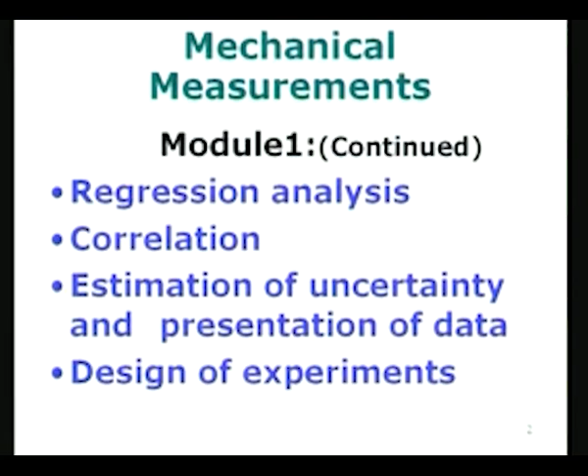And the last topic in module number 1 would be the design of experiments. We will talk about how to conduct the experiments, whatever may be the type of experiment we are going to do, how to organize the different instruments, how to look for the proper instruments to be used for the measurement in the particular experiment we may have in mind, then how many data to collect, what kind of variations or ranges of data we should have, and so on and so forth. This will be the final part of module 1, which will be on the design of experiments.

With this overview, I am going to the first lecture in this series, which is just an introduction to the study of mechanical measurements.

Measurements can be classified according to the field in which we are going to be working. Electrical measurements, of course, describe measurements in electrical engineering or electrical sciences. Measurements in physics or physical sciences have their own flavor. Measurements in biological sciences, they have their own flavor, and so on.

Mechanical measurements pertain to measurements which we undertake in mechanical engineering to describe various systems which we meet with in practice. There may be a thermal system, there may be a mechanical system involving measurement of length, velocity, acceleration, and so on. It could be thermal, for example, temperature measurement, pressure measurement, anything which has to do with the thermodynamic or thermal characterization of systems, which will come under that category. And then, of course, there are various other ways of classifying measurement, which will come to as we go along.

So the three important reasons for making measurements are: one, generate data for design; two, generate data to validate or propose a theory; and three, for commerce. In this set of lectures, we will be interested only in the first two, that is, generating data for design and generating data to validate or propose a theory.

With that brief idea about why we carry out measurements, let us look at the categories of measurements. Different people might categorize it in different ways, but I am going to give a possible way of categorizing measurements. There are, in fact, only two major categories: one we call the primary quantity, shown in the slide, and the second one I call the derived quantity. I will describe this more fully in a moment—this is regarding the quantity we are going to measure in our experimental or measurement process.

For the primary quantity, for example, I can think in terms of the temperature of a system or the length of an object. This is the primary measurement, which can possibly be done using a single instrument.

For example, time - I am going to use a clock and make the measurement. There is nothing more to it, there is no division possible. Time is the measured quantity, and there is only one quantity I am going to talk about when making the measurement of time or time duration of a process.

However, when we talk about the derived quantity, it will assimilate into itself several different measurements. As an example, I can give velocity. Velocity is the distance travelled by a certain moving object divided by the time it has taken to cover that particular length of travel. So the derived quantity requires at least two measurements: one, the measurement of the distance between the two points which has been covered by the moving object, and then the time it has taken for this particular action or activity.

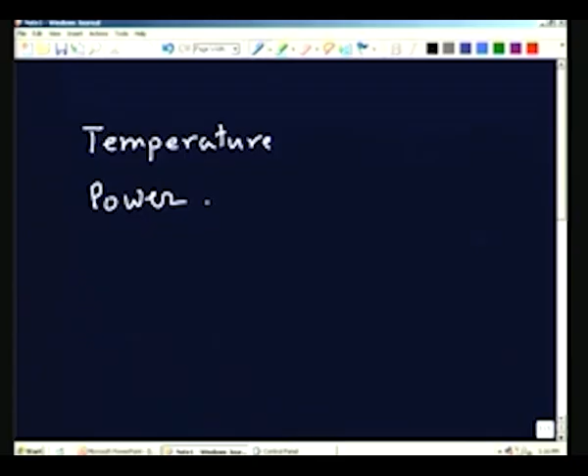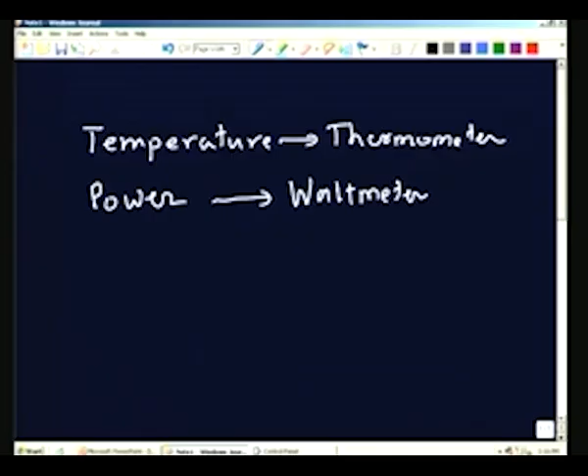Another example would be the measurement of power. Let us take the example of an object which is heated, and the power can be measured using a wattmeter, temperature could be measured using a thermometer, and suppose we want to look at the process of heat transfer.

We measure the temperature of the object, we measure the power which is given to the system, then the heat exchange is measured in terms of a flux, which is nothing but power divided by unit area. Power itself is a quantity which is per unit time. So when I say heat exchange process, I am talking about a flux which is the ratio of power per unit area. The power is measured using the wattmeter, and the area has to be measured using subsidiary measurement.

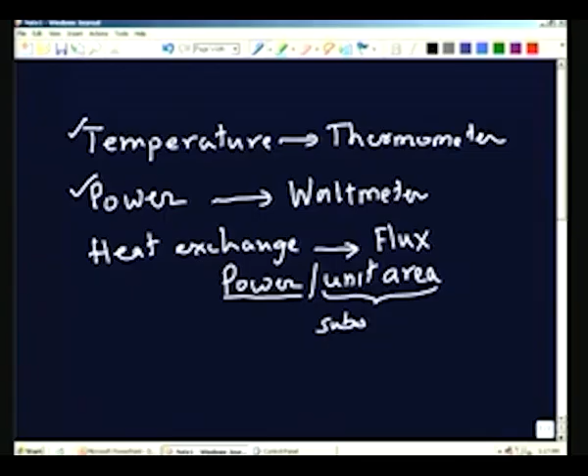For example, if it is a cylindrical object, I will measure the height of the cylinder and the diameter of the cylinder.

So if I am interested in finding out the effectiveness of the heat exchange process, I would be introducing a quantity like the heat transfer coefficient. This example will show exactly how many different things we have to measure for obtaining this quantity called the heat transfer coefficient.

We can define this as power dissipated per unit area, that is the flux, divided by the temperature difference between the system and the surroundings to which the heat is being transferred.

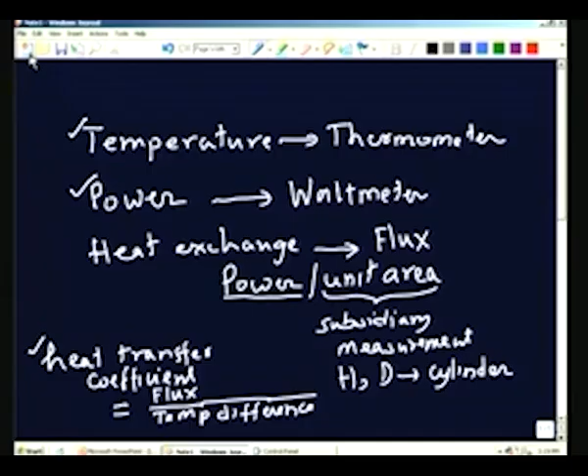So let us use some symbols, and then in the next page I am going to show what is happening. If I use the heat transfer coefficient as H, this is nothing but the power dissipated per unit area, P divided by A, divided by delta T, the temperature difference.

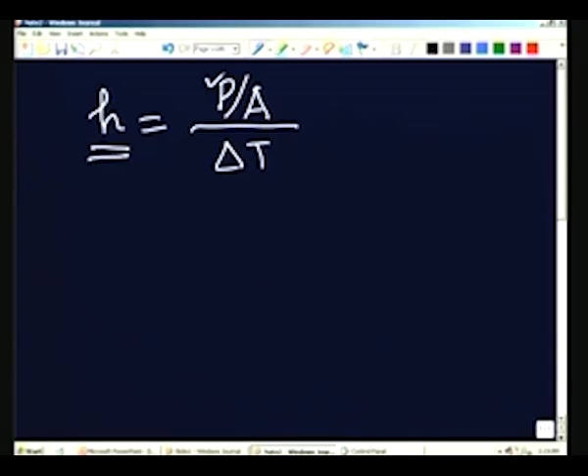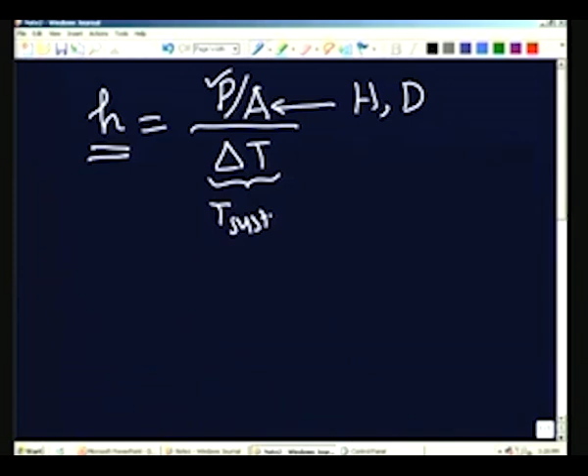So the quantity which I am interested in finding out, the heat transfer coefficient, requires measurement of power, one primary quantity which is being measured. Area itself may involve measurement of the height of the cylinder and the diameter as I indicated. Therefore, two measurements are going into this, and of course here I have the temperature of the system and the temperature of the coolant or what is taking away the heat.

So essentially, if you look at this particular simple experiment of determining the heat transfer coefficient from a cylindrical object to a coolant flowing around it, I require 1 power measurement, 2 length measurements, and 2 temperature measurements. So the total number of measurements is just the sum of all the 1, 2, 3, 4 and 5. 5 measurements are at least required, and all these 5 different measurements are of different quantities.

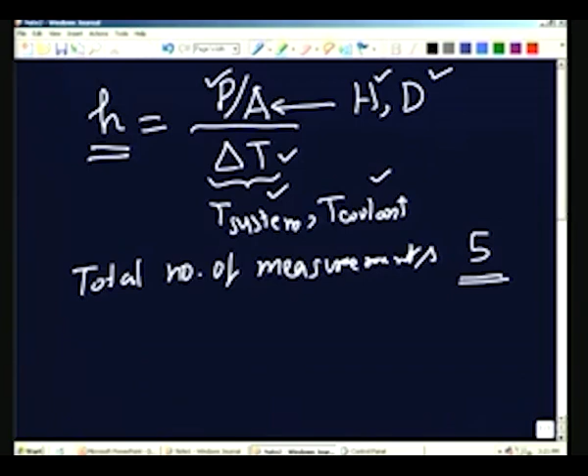Power is the amount of heat which is being dissipated, which may be measured in terms of the amount of heat input to the heater if it is an electrically heated object. Then the area involves the height and the diameter measurement, these are length measurements, both are lengths. They may require different instruments. The height may be measured by one instrument and the diameter may require the measurement using, for example, a vernier caliper or something like that. And the temperature, of course, we may require different thermometers as required.

So the total number of measurements is 5, and what we are going to get is one derived quantity. So to get one simple derived quantity, the heat transfer coefficient, which is normally used in heat transfer applications, I require to make at least 5 measurements to get an idea about this derived quantity. Therefore, 5 primary measurements or 5 primary quantities are measured, maybe using 5 different instruments, different types of instruments, and then they are combined together using a simple formula like this, P by A divided by delta T. Of course this formula seems very simple in this case, but there may be cases where the formula may be more complicated.

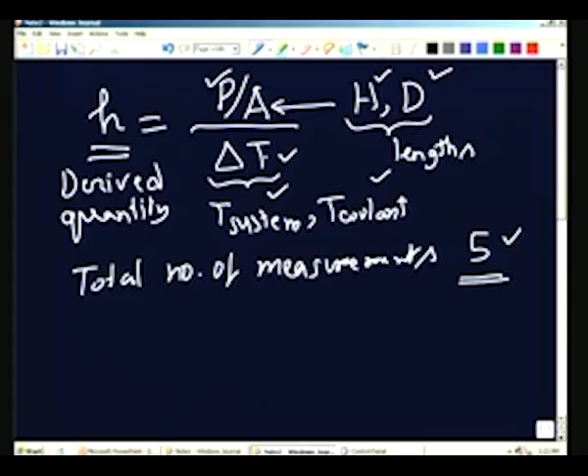Let me take one more example. Suppose I want to measure the volume of a vessel. This is also an important measurement which is required in many applications. There are several different methods. Let us just look at 1 or 2 ways of doing it.

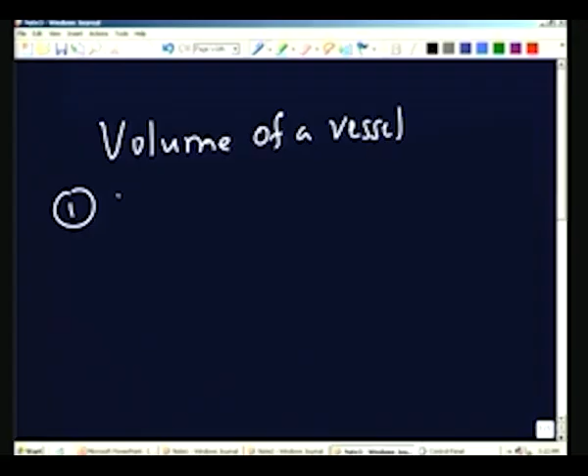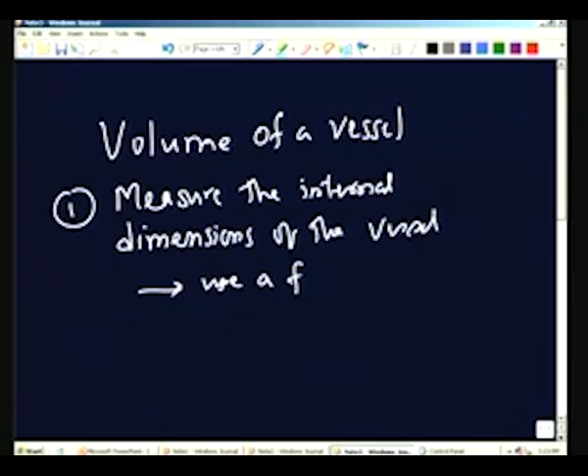One is, of course, to measure the dimensions, measure the internal dimensions of the vessel, and using a formula to calculate the volume. A second method, of course here we are measuring, but we are measuring the internal dimensions and then combining them using a formula.

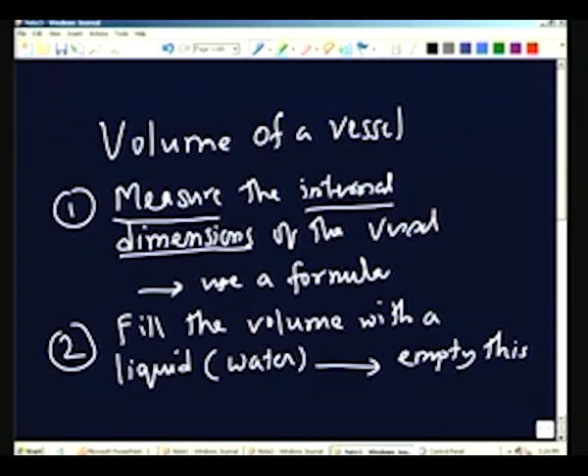Or we can fill the volume with a liquid, so fill the vessel with a liquid like water, for example, which is easily available. Then empty this into a measuring jar.

So let us look at the difference between these two methods of measurement. In the first case, I am measuring the internal dimensions. If it is a spherical vessel, for example, if it is known that it is a spherical vessel, I need only one measurement, the diameter of the sphere, the inner diameter of the vessel.

If it is a complicated shaped object, it becomes more and more difficult to make this measurement. This is difficult to perform if the shape of the vessel is not very simple. So the method number 1 is not necessarily the one which we are going to adopt.

The method number 2 has some great advantages, because the shape of the vessel is not a very problematic thing in this case. You just fill it with water and then transfer this to a measuring jar. A measuring jar is nothing but a vessel of known shape. So whatever is occupying the vessel, whose shape may be non-uniform or complicated, I am going to transfer it to a vessel whose shape is very simple and straightforward.

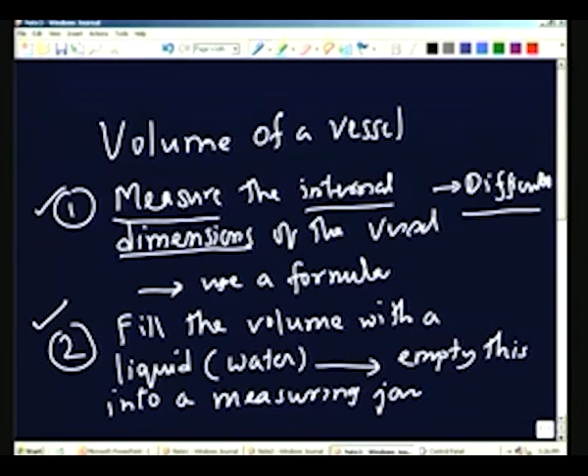So we have talked about primary and derived quantities. I have given one or two examples which indicate different types of measurements and the number of measurements required for a derived quantity obtained, and so on. I have also given some idea about how to look for a specific method which is better than another one which you may think of to start with.

We will see later that the errors in measurements are linked with the number of measurements we make, and if you can find a method which requires a lesser number of measurements, it is likely that the amount of error we make in the measurement of the derived quantity will also be smaller.

So with this background, let us look at the intrusive and the non-intrusive methods slightly more in detail, and for this let me use the board. So what I am going to do is to take one or two examples again, like we did in the case of the other two cases. Let us look at measurement of velocity.

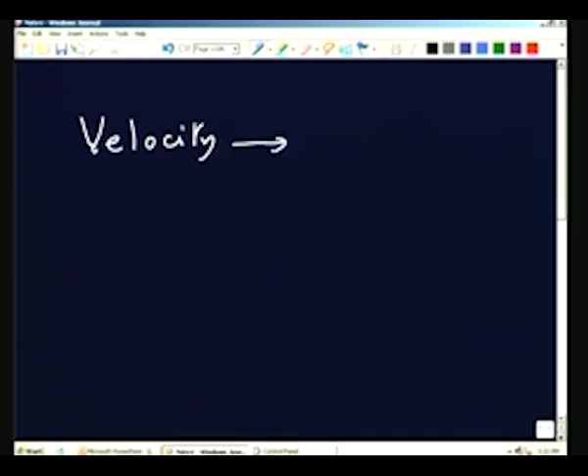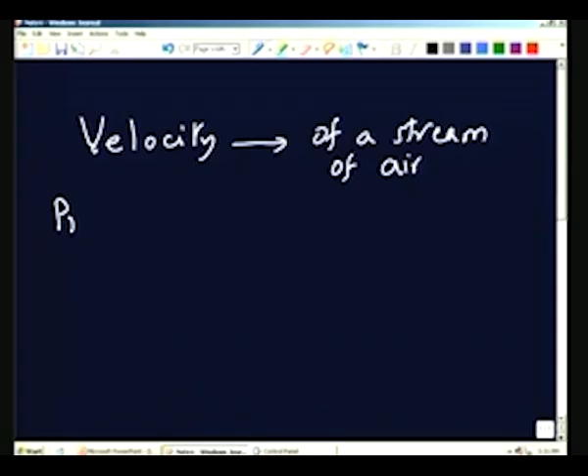Now I am interested in measuring the velocity, let us say, of a stream of a liquid or a fluid, of a stream of, let us say, something like air, velocity of a stream of air. There are several methods available for doing this, and we will consider it more fully when we take up the measurement of velocity in its own right. But right now, what I want to do is show the different possibilities, and look at probe type and non-probe type, or non-intrusive, methods.

Those of you who have had some exposure to fluid mechanics will know that the velocity of a stream can be measured by converting the velocity head to a pressure head, and for example, we can use an instrument like a venturi meter.

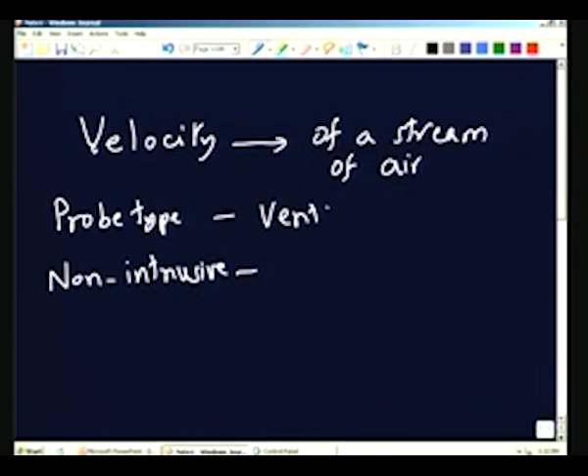So in the case of a venturi meter, what we are going to do is deliberately introduce a change in the area of cross section of the flowing tube, possibly shaping it in the form of a converging-diverging nozzle, and therefore we change the area of cross section and therefore the velocity of the fluid flowing through it.

So when the velocity increases, as it goes through the converging part of the nozzle or venturi, the velocity will increase, and because the velocity increases, the pressure will drop. So we measure the pressure drop across the venturi, and then we try to find out what it corresponds to in terms of velocity.

So the venturi meter is a probe type one, because it deliberately introduces a change in the cross sectional area, and therefore there is a change in the velocity. We are not measuring the velocity which originally existed, but we are trying to modify the velocity to increase it and then try to measure it. And of course, in this whole process, there will be some additional pressure drop.

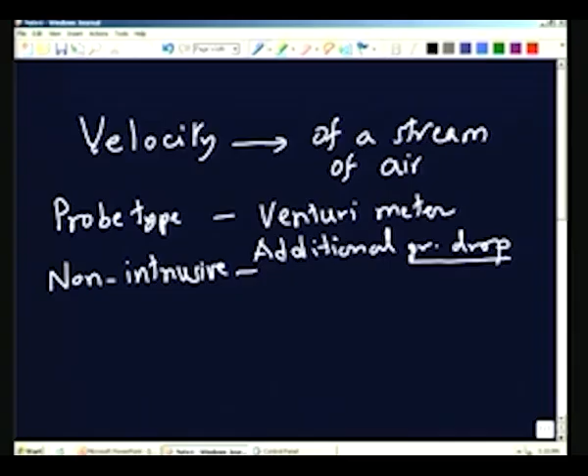Other than the pressure drop due to the acceleration of the fluid, there will be additional pressure drop due to viscosity, and this cannot be recovered. Therefore, the probe type will certainly give you the velocity of the fluid stream, but it will also introduce some kind of pressure drop, which is a disadvantage. Suppose I use a non-intrusive method. For example, I use a laser Doppler instrument.

It is considered to be non-intrusive.

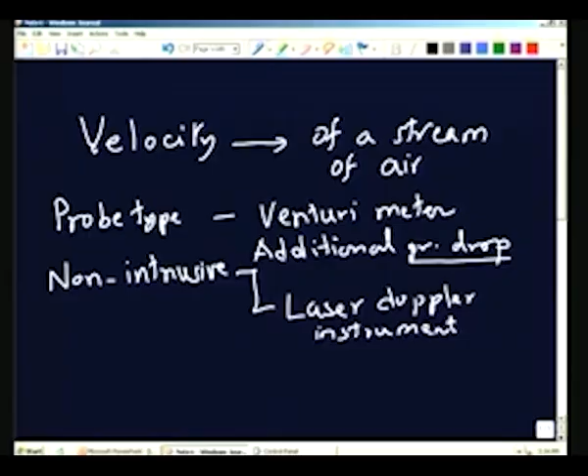So what I'm going to do is use a laser beam, or maybe more than one beam, make it cross and go through the medium whose velocity I want to measure. Assuming that the medium has some dust particles, these dust particles will scatter the laser radiation, and by looking at the scattered pattern, we'll be able to get the velocity of the stream.

In the probe type which uses a venturimeter, I'm going to get only the average velocity of the fluid in the tube. In the case of the non-intrusive laser Doppler instrument, I can measure the velocity at any point within the flow, meaning I can get more information. By scanning the entire cross section of the flow, I can even find out how the velocity is varying across the cross section. Therefore, not only is it non-intrusive, it is also more productive, because it gives you more information about what is happening across the cross section.

Of course, non-intrusive is a relative term. We are assuming that some naturally occurring dust particles in the air are going to do the business of scattering the radiation. If not, we are going to introduce some small particles in the form of smoke, for example, and that will also to some extent interfere, but normally it is considered non-intrusive.

The advantage of the non-intrusive method is that it gives you the information without any probe, and therefore there is no external influence on the flow. Of course, you may require a window which is transparent to the radiation, so you have to arrange it properly. It may be more expensive to do the non-intrusive measurement, but it can also give you more dividends in terms of better, more accurate measurements, and it will give you details which the probe type measurement may not be able to give.

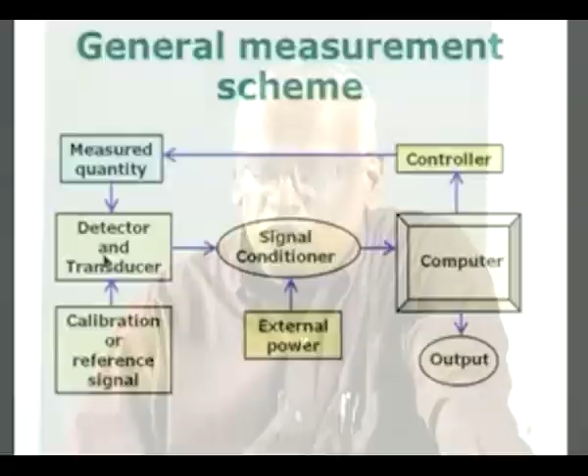A detector and a transducer go together -- the detector which responds to the measured quantity or its variation, and the transducer to change it to the form of a signal which is easy to condition or manipulate and so on. Many times the detector and transducer system may also have its own calibration or reference signal.

For example, if I'm measuring the temperature of an object, I may want to compensate for variations in the temperature of the surroundings. So what I have is a reference signal which is produced either electronically, electrically, or by having another instrument, such that it compensates the measurement you are doing. If it is prone to any influence of the room temperature, I can produce a signal proportional to the room temperature and incorporate it in the detector part. That means I can compensate -- if it varies, I can compensate for the changes of that particular quantity.

Once the detector detects or measures the measured quantity in terms of an electrical signal, it can be conditioned to whatever is required by the rest of the components shown here. For example, in analog instruments, the signal is usually in the form of current or voltage, and directly measured using an ammeter, voltmeter, or oscilloscope.

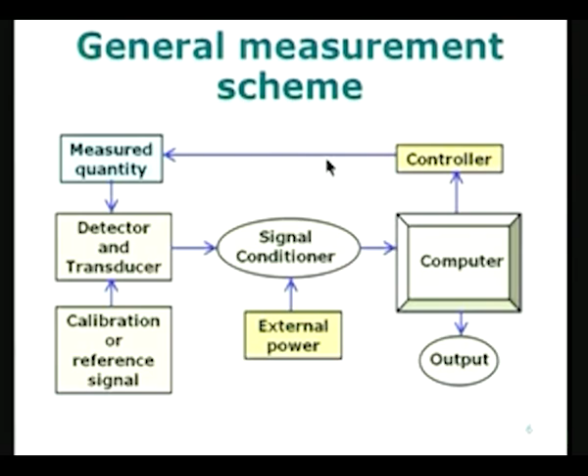Whenever we talk about measurements, as I mentioned when introducing the module, we have to think in terms of the errors which may occur in the measurement. For example, if I am talking about the measurement of several quantities A, B, C, D, etc. for a given derived quantity, all these quantities are measured using an instrument or maybe different instruments, and each instrument has its own problems in terms of errors. We will have to see how these errors are characterized, whether we can take care of them, whether we can estimate them. Therefore, the first issue we have to face is errors.

Errors are always present, even with the best instruments and the best measurements, you will have some errors there, and these errors may be of two types, systematic or random. We will take up these two cases slightly later.

The other issue which is very important is the repeatability of the measurement. If you make the measurement on one particular day and repeat it after 2-3 days, or you make the measurement repeatedly, one in the morning, then set up the experiment again and make the measurement in the afternoon, and so on, repeatability means: are these going to be close to each other? If the measurements made at different times give you the same value—of course you cannot get exactly the same value—are the values close to each other? Repeatability talks about the closeness of repeated measurements.

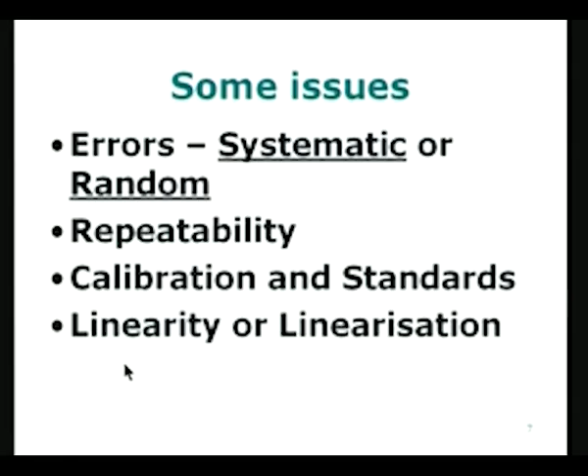But nowadays, with data acquisition systems, computers and so on, these have not much importance, and therefore we are not bothered about linearity or non-linearity of the output. Any of them can be taken care of easily by proper signal conditioning and using the proper instruments and so on.

So, let us look in more detail about the nature of measurement errors.

These errors, as we mentioned earlier, may be of two types, and I am just recapitulating them in this slide. They are prone to two types of errors. One we call the systematic error, and the second one random error.

Systematic means whatever you do, your measurement is always going to have some error. That error is systematic, meaning you cannot reduce it or avoid it entirely. If you are using a particular instrument which has some defect, whatever measurement you make, that defect will show itself. By calibration and standardizing, we can certainly reduce the systematic error or account for it, making a correction. So systematic errors are those which can be accounted for by proper evaluation of the instrument or the process of measurement, and then we can remove or at least reduce it to a large extent.

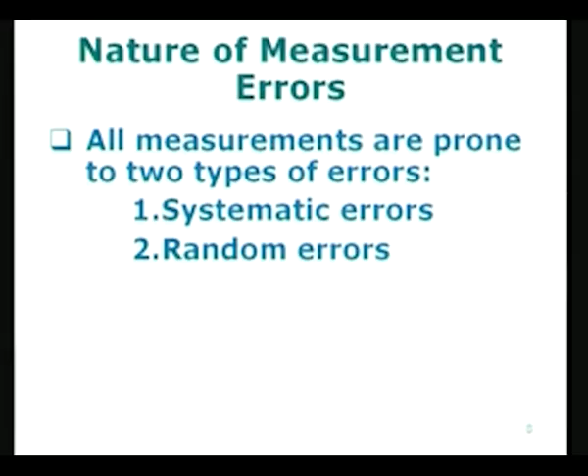However, if I look at the so-called random errors, no such possibility exists. Random errors are not quantifiable directly in terms of a cause and effect relationship. We cannot say that the random error is because of a particular reason. Random errors occur because of unknown, untraceable reasons. Therefore, we will look at these in a little more detail.

Systematic errors we also refer to as bias. They are due to faulty or improperly calibrated instruments. They may be reduced or eliminated by careful choice of instrument, as I indicated just a while ago.

However, if I look at the random errors, these are due to non-specific causes like natural disturbances that occur during the experiment. There may be vibration, or if you are doing a heat transfer experiment for example, there may be air movement in the room which may affect the heat transfer process, or somebody may shake the table and alter the readings we are going to get. These are something which cannot be quantified, cannot be eliminated. What we can do is look at the characteristics of these errors in terms of a statistical analysis.

We will go to the next slide and see that random errors have some statistical feature which characterizes them. So the statistical analysis of the data is only going to talk about the random errors, and if you look at the systematic errors, there is no such statistical analysis possible. Statistical analysis will only apply to the random errors because they have some statistical variation in them, and we can characterize it by statistical analysis, which is what we are going to look at in a little more detail before we proceed.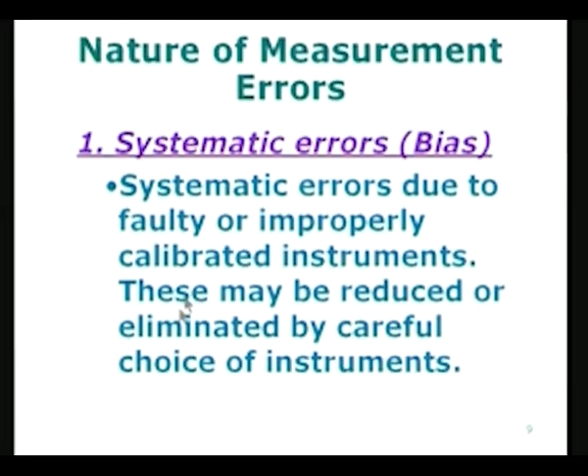For example, if I am measuring a particular quantity whose value is already known to me from some reference, or somebody has already measured it, then the systematic error or bias will be the difference between the value I obtained in my laboratory using my measurement process compared to the accepted value for that problem. For example, the acceleration due to gravity g is known to be about 9.81 meters per second squared. Suppose I make an experiment in the laboratory using a pendulum and measure the time period of oscillation, and from that obtain the value of g.

It may either come out to be 9.81 or it may be slightly different. So if I repeat this measurement of g in my laboratory, I may consistently get a value which is either greater or less than 9.81, which is accepted as the correct value by many people, at least at sea level. Now the difference between the value I am getting and the value quoted by others, we will refer to as the systematic error, or the bias. So whenever I measure and get a different value, that means my measurement has some systematic error in it, and if I look at the causes for this and make a correction or change the experimental setup, I may be able to reduce or even eliminate it.

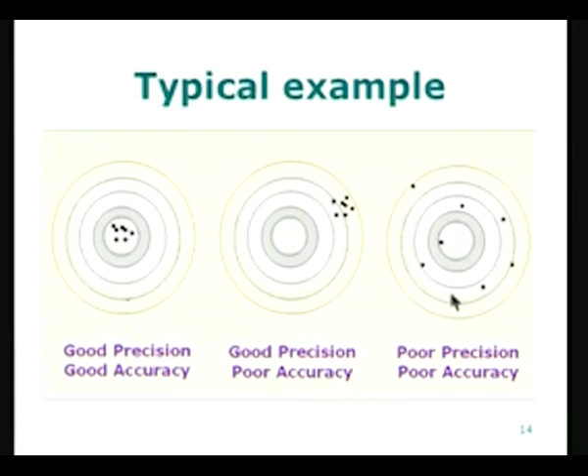So you can see these three examples: one is good precision and good accuracy, the second is good precision but poor accuracy since it is clustered in the corner, and the third is neither precise nor accurate. To summarize, experiments are also like this target practice—one would like to get the best possible and most accurate value, and also try to get the most precise value with the least amount of random errors.

What we will do in the next lecture is amplify on these, try to characterize these quantities, and look at a few examples for this. Thank you.